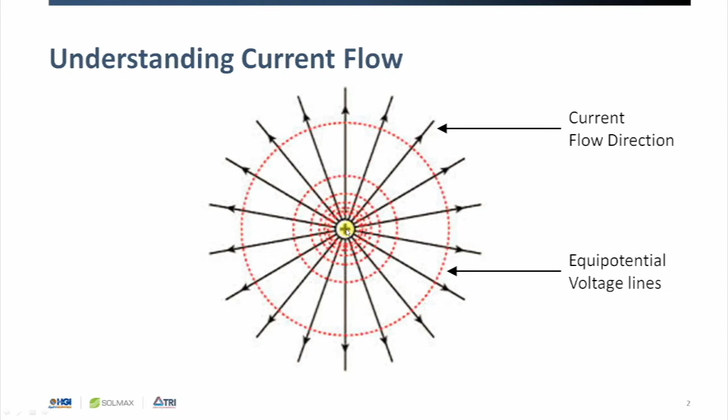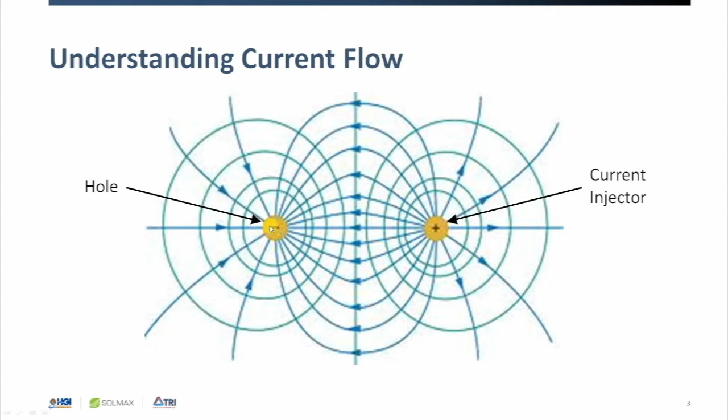It's easiest to visualize the current flow by thinking of it as flowing like water. So when we charge a survey area with voltage, it's like filling a reservoir with water. And then if that reservoir has holes or outlets, it's going to slowly trickle out of those holes and outlets. So the voltage potential lines end up looking like a topographical map that corresponds with the hydraulic surface elevations.

So in this diagram here, we have our positive electrode. This would be a voltage high point, and our voltage low point would be where there's a leak. We have a dipole operator that's reading the voltage potential lines from the surface. So the leak is going to look like a bullseye centered around that leak location.

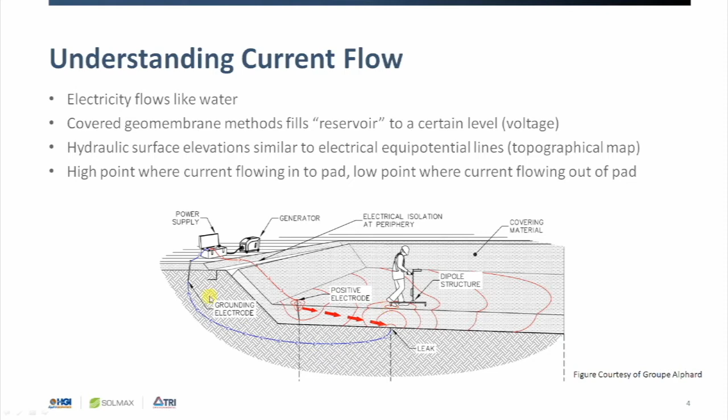There are actually several methods for testing covered geomembranes. There's a monopole method where you have a roving single probe on a long cable with a static reference electrode, and this is going to produce a voltage map that's a lot like a topographic map. Then we have the dipole method, which is the most commonly used. The reason it's the most commonly used is that, frankly, it's the most effective. We'll talk about why in a couple slides.

It's also the only method with an ASTM standard practice associated with it. In fact, there are two of them, and I'm going to be talking about the differences between the two in the next webinar.

There are also some advanced geophysical methods that are proprietary. We have deep soil fills, buried tanks, deeply filled ponds that Sean's going to be talking about in episode 4, and the permanent monitoring systems he described last time. For me, covered geomembrane methods just means the dipole method, because that's the only method that I perform. To Sean, it means the dipole method plus some other proprietary methods that he will be talking about later.

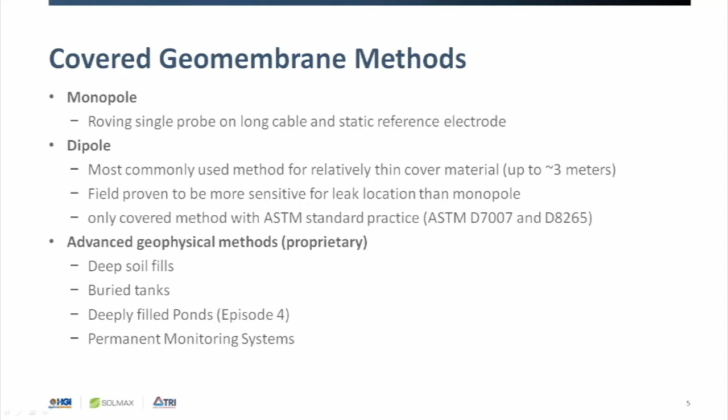You'll notice string lines placed throughout the survey area. You must survey in a grid pattern throughout the survey area. If you don't have a GPS guided system, you'll need these string lines. Even if you do have GPS, you still need the string lines if you don't have a GPS based guidance system.

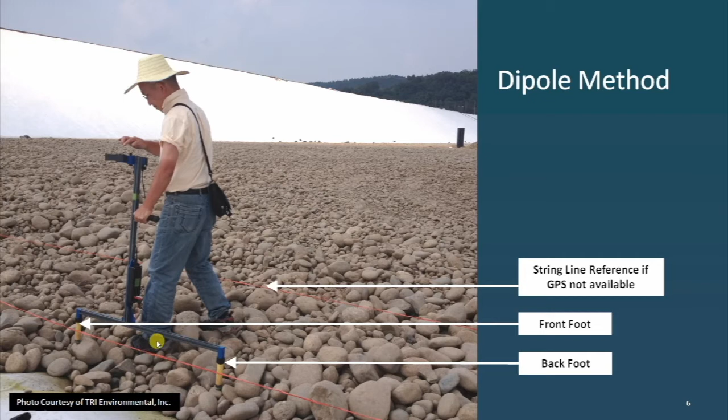So the dipole apparatus is not measuring absolute voltage like the monopole would measure. It actually measures the voltage gradient, which would be like on a topographical map, measuring the slope of the surface of that map. Rather than getting an absolute elevation, you're getting an elevation differential so you can tell whether the ground is sloping downward or upward. So leak locations are like sinkholes - they're low points in the topography.

As the dipole travels across it, you're going to get a downward slope followed by an upward slope as you travel past that leak.

I use an internal convention of measuring from the front foot to the back foot, because otherwise it won't make any sense when I say downward versus upward slope. You have to have a standardized reference. So I'm always going to refer to the dipole measurements as being measured from the front foot to the back foot. To help you understand how to read a map created by the dipole method, it's easiest to show what that same map would look like using a monopole.

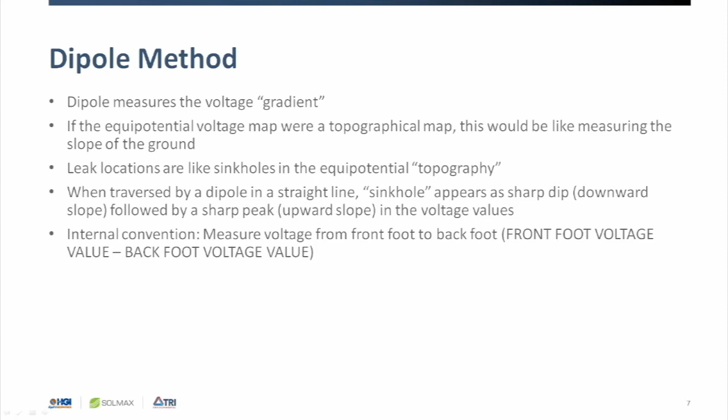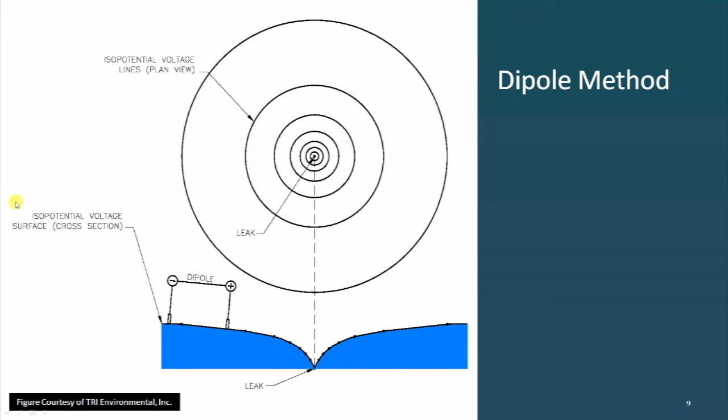This slide shows a plan view of the voltage potential lines and what the dipole actually measures in terms of voltage as it travels across the leak location. This traverse is right across the leak, so one of the feet is going to hit the leak. As it travels across the voltage values, you see the zero right here.

This is a negative voltage range. The magnitude of the negative voltage is going to get very sharp right when the front foot is over the leak, so you're going to have the most negative value when your front foot's on the leak. Then it's going to pass through zero and you'll get the highest positive when your back foot is over the leak, and then that positive value will taper down to background values.

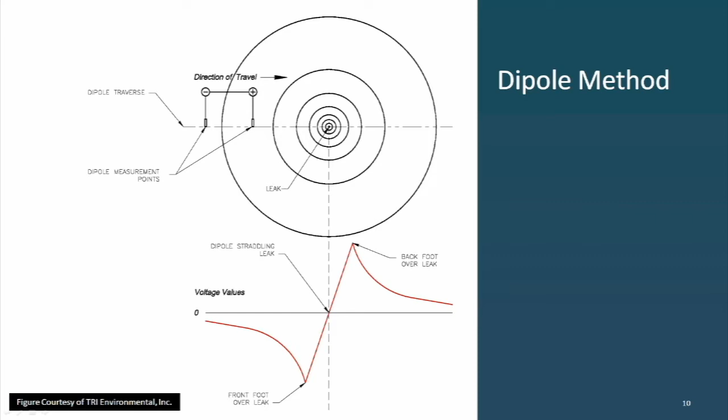This slide shows what the dipole traverse looks like when it's slightly off of the leak. The voltage values, you can see the curve is a lot softer and the magnitude of the signal is not as big as when the dipole is directly over the leak.

What this does is allows us to pinpoint the leak and get right on top of it because we move back and forth until we find the strongest negative and positive sign change in the voltage values.

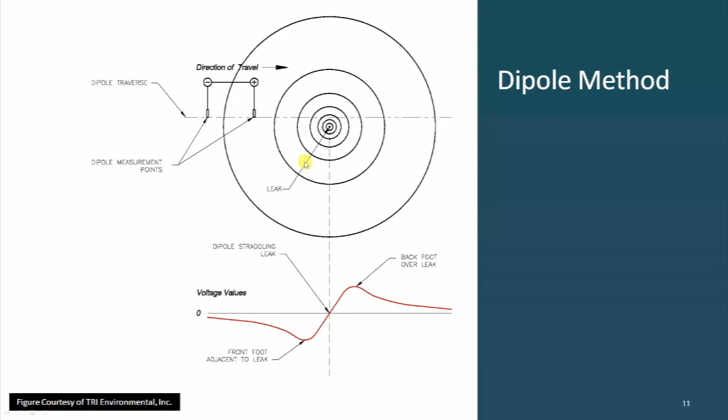So this is a voltage map created by the dipole method. The dipole is traveling from bottom to top of the map. The current injector is located here. What the current injector does is it roughly divides the survey area in half, and it has positive values on the bottom half of the map and negative values on the top. When you're looking for a leak, you're looking for something with the opposite polarity of the current injector.

Current is coming in at the current injector and going out at leaks. So leaks tend to look like a little butterfly on its side, with a little bubble of negative below and a little bubble of positive above, separated by tightly spaced contour lines. So we have a fairly large leak signature right here and a little bit smaller leak signature right there.

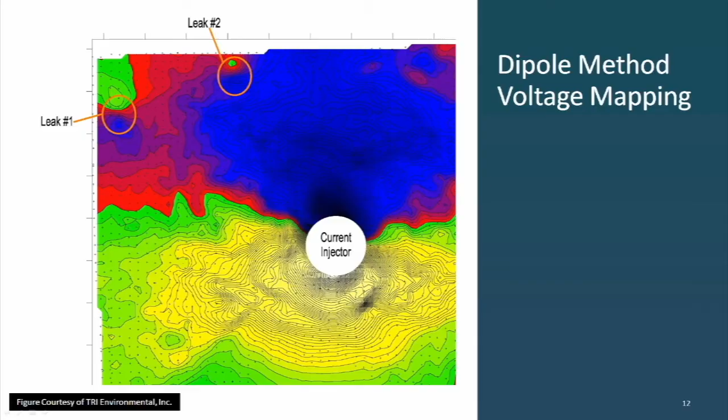This is a double dipole. It actually has a dipole on the left and a dipole on the right. And it has not only GPS-based data acquisition, but it also has a GPS-based guidance system. So you notice there's no string lines in the survey area. This unit creates a local coordinate system and guides the operator virtually, so they're just following along the y-axis of the survey area.

When you have a guidance system like this, it saves time in laying out those string lines. And when you have GPS-based data acquisition, it's much easier to get much better resolution for survey areas that aren't square or rectangular. So if something is shaped like a big amoeba, you can just go off your line and record data points as necessary. If you're stuck surveying along those string lines, you're only going to be collecting data along those string lines.

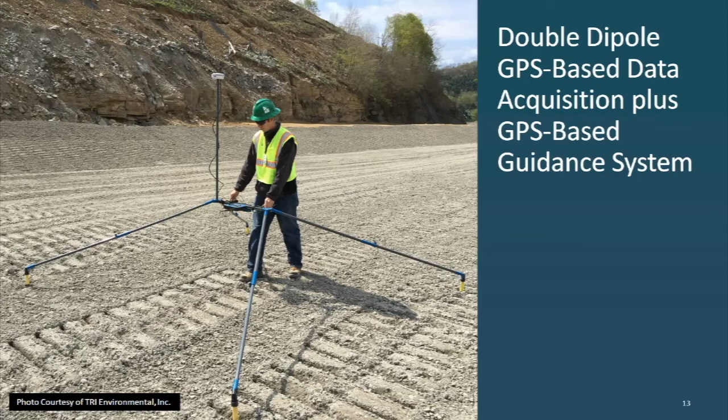Now I'm going to talk about how to prepare a survey area to be electrically tested. Current is always going to travel the path of least resistance, so if there's an access road in place or anything that allows the current to flow outside the survey area, it is going to compromise the leak detection sensitivity.

Anywhere the cover material is providing a current path to the underlying material or to ground is going to behave like an actual leak. So us as electrical testers, we have no idea whether it's a leak or something else that's conducting the current. So as designers, you need to be cognizant of what could possibly cause current leakage from the survey area.

If we can manage to create complete electrical isolation of the cover material, the only path the current can take is through leaks, and that's when you're going to get your maximum sensitivity. So there's two things that we need for applying the method: we need survey area isolation, and we need moisture.

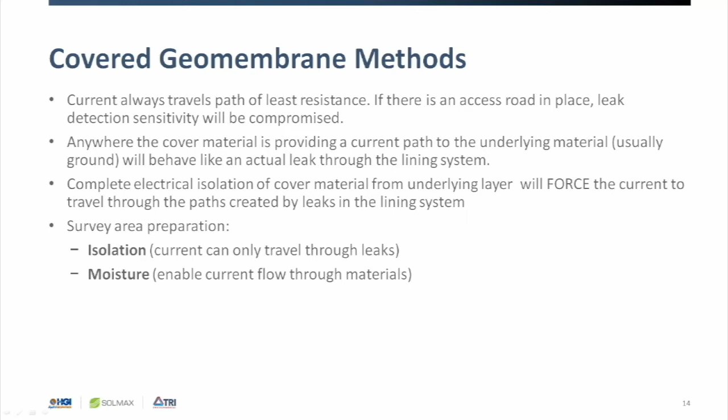First, I'll talk about isolation. Here's a photo of a new landfill cell, and you can see that there's a gap that was created in the cover materials. The geosynthetics are intact in this gap, so there's liner and geocomposite or geotextile. It's fine for those to be intact.

It's just the gravel and soil-based materials that are kept away from that tie-in area. This is what we call an isolation trench. It's critical for method functionality.

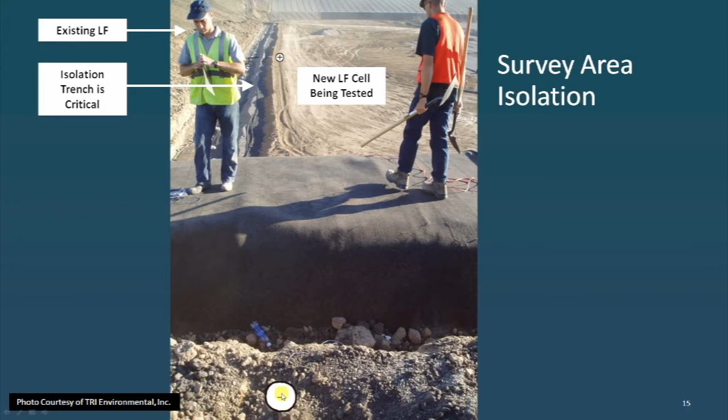Here's an illustration: this is the positive current injector electrode inside the new landfill cell, and we have a ground outside because this happens to be a single-lined landfill. We need isolation along every side of the landfill. Some people don't realize that even the tie-in needs isolation, every single area.

This is an oddly shaped landfill expansion cell, but we need isolation along the entire perimeter, even the access road. Usually the cover material is hauled from a location or locations, so we need this cut, and ideally as dry and clean as possible.

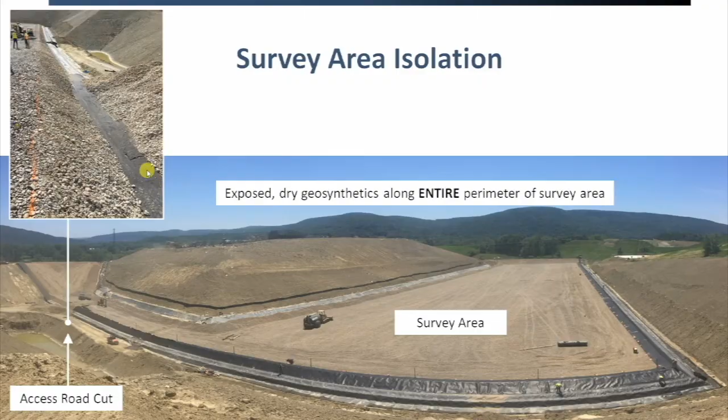This is another isolation trench. We have the survey area on the left and the ground on the right. You'll notice there's a lot of piles of material here. It's very common to leave a windrow right outside this isolation trench because the contractor is going to eventually fill in that trench. Those piles of material are not an issue, especially if you have a larger dipole spacing.

The thickness of the cover material should not exceed the spacing of the dipole. The dipole we use is 3 meters or 10 feet. So we can deal with piles up to 10 or 15 feet thick, and have actually detected leaks under piles that thick. This is an anchor trench.

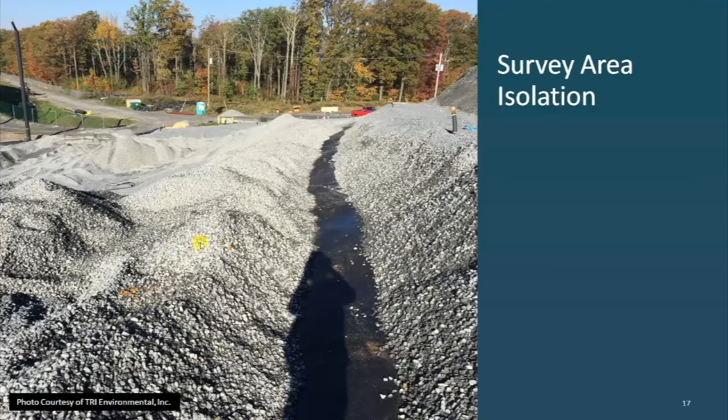You can see the geosynthetics are intact. Something like geocomposite and geotextile, they're not electrically conductive when they're dry. The problem with these is they can actually retain moisture when they get wet. So sometimes when there's a rain event, we might need to wait until these materials dry out.

The other thing about these materials is if they get muddy, they're very hard to clean without cutting them back. We've had some cases where they get so wet and muddy we have to cut them back. We don't want to do that, so it's best to keep them clean and hopefully dry. But if it's just rainwater, that can dry up fairly quickly in the sun.

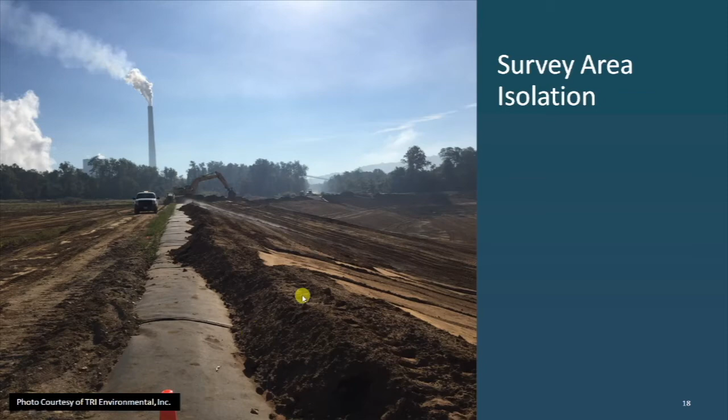This is an LCRS trench. We do not want that rock in place. It's better to just not place that rock. It looks like they placed this and now it's quite dirty, and they pulled it back after we told them we needed isolation. Much better to just not place that material in the first place.

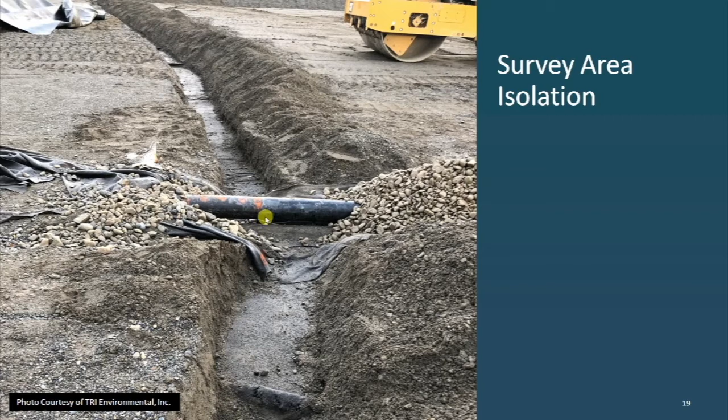This is a tie-in area. See how much moisture is here? This is a very common sight. A lot of the sites we perform this method on get rainfall every 3 or 4 days, so it's virtually impossible to keep this particular tie-in area perfectly dry.

The thing is rainwater is not conductive. When rainwater hits some mineralogy, it can pull off some ions and become conductive, but it's not super conductive. So this kind of isolation issue is not a deal breaker, we can usually manage something like this. The thing that's not good is when this is muddy. Rainwater okay, mud not so much.

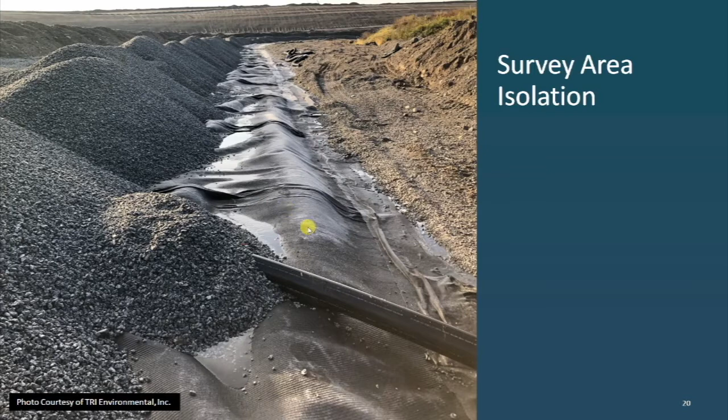We strongly advise the contractor to place a rub sheet under the access road so that when they remove it for our survey, it's not that dirty. They put this rub sheet down on top of the geocomposite so when they place the material, it doesn't fill the geocomposite with fines. So under this flap right here, the geocomposite is actually very dry, which provides much better isolation for us.

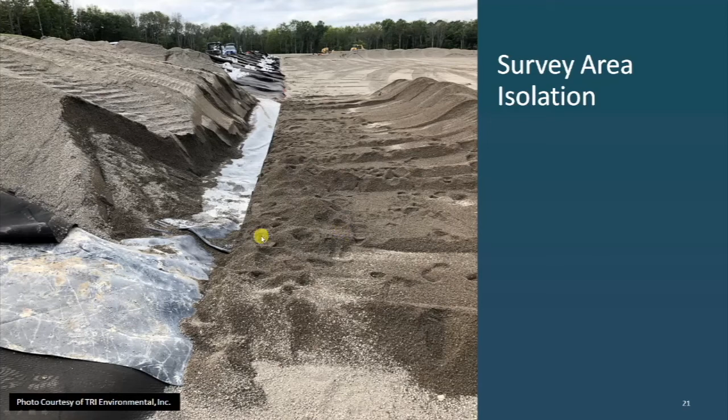If we need to water during the survey, so we need an access road in place, you can always weld a little geomembrane flap along the access road location and then push the material up. This geomembrane flap actually bisects the access road so that the road can be in place for the trucks, but it's actually electrically isolated.

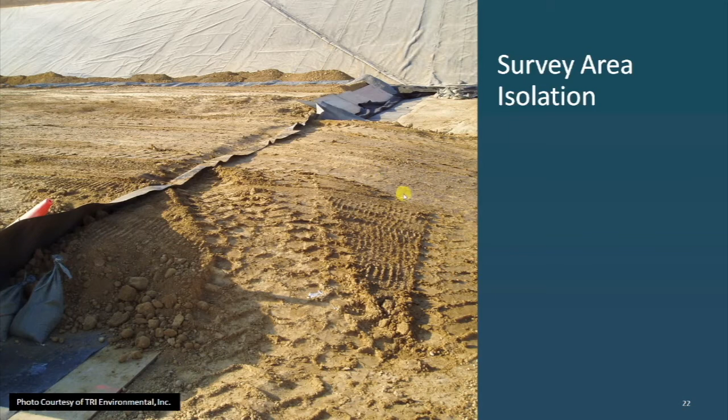So as I was surveying, I started picking up a leak signal and it led me right to this pipe. I thought, what's that made of? Turns out it was ductile iron. So I stopped what I was doing and had them excavate the iron pipe.

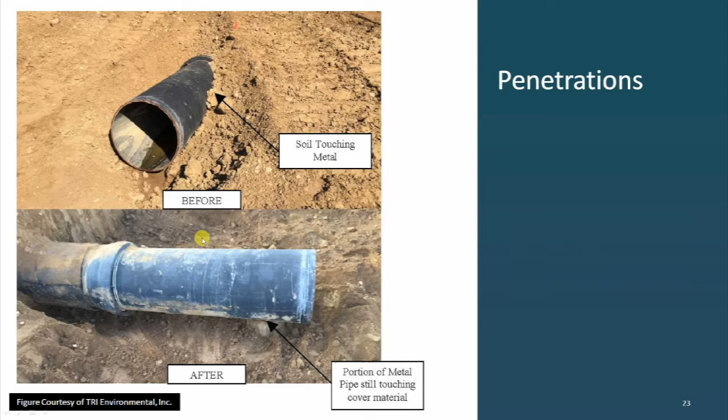But fortunately, I was able to still pick up a little knife slice in this project. So at this particular project, yes, it disrupted the survey, but it really only compromised sensitivity locally to the penetration. For this project, every project's different. Sometimes something that large can mask leaks anywhere in the survey area.

In fact, before we excavated that ductile iron pipe out and left that little wet wood in place, that ductile iron pipe was affecting the sensitivity of the entire survey area, because my artificial leak was set up on the far distant half of the pipe, and the sensitivity was poor to begin with. Then I checked it again after we excavated the pipe and it was very good. So this is why we try to minimize the isolation issues.

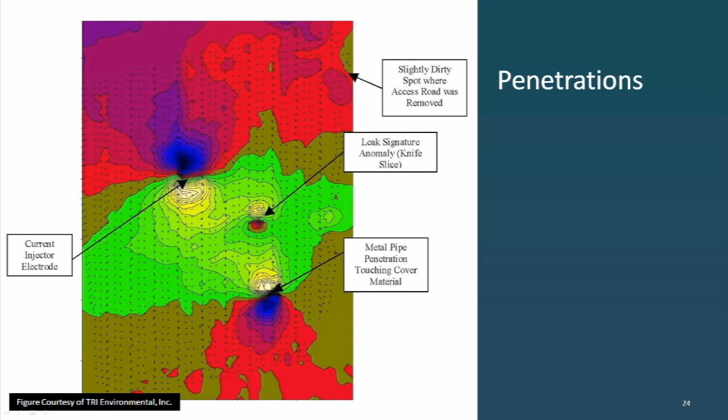So we talked about isolation. The next most important thing in survey area preparation is moisture. This is the most common question I get: how much water do I add? How much moisture? What's the moisture content? How wet is wet enough? Unfortunately, it's not a simple answer. The answer is there's actually 3 different reasons why we need moisture in the cover material.

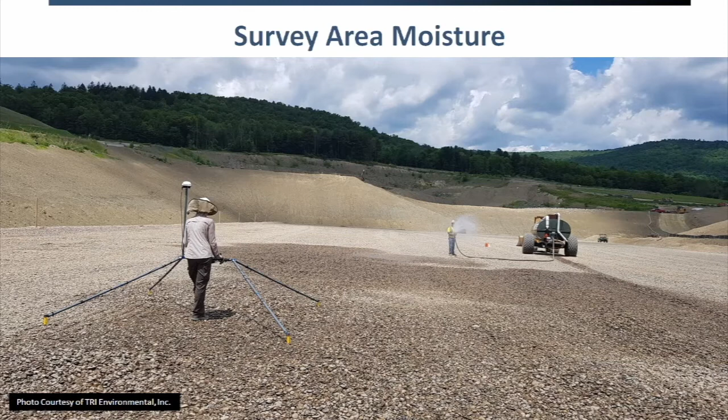The first reason is that the cover material itself needs to be electrically conductive. We don't usually need to add moisture to make this material conductive. Usually it's conductive enough at a natural moisture content. The highest moisture content we could possibly need is for something like sand, and it needs about 6%, but usually it's only about 1%. Very, very easy to attain.

The other reason we need moisture is that if you have a very small hole, and especially if you have overlying geotextile or geocomposite, that hole is not going to be electrically connected to the cover material unless it's wet. So ideally, we want the survey area to have experienced rain recently, but if it hasn't, and all of those geosynthetics are dry above the hole, it really needs to be watered enough to actually cause the geomembrane to leak if you want to find those really small holes.

The third reason we need moisture is that the surface will sometimes desiccate, depending on the material. Something like a clay or a gravel, they tend to desiccate in the sun. So it's weather dependent, it's climate dependent, but we need our probes to have good contact with the cover material.

So when we come to site to test, the only reason we're going to ask you to water is if we can't get good readings through the surface. We will document the condition of the liner. We're going to dig a test pit down to the top of the geomembrane to place an artificial leak, which I'll be talking about next episode. And we're going to make observations on whether the geosynthetics are dry or not. But ultimately, we're not going to direct the moisture unless we can't read through that surface.

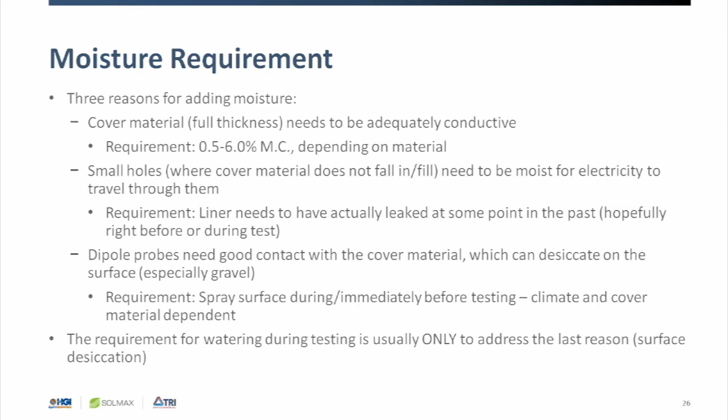If you can't drive on the cover material to water with a water truck, which is the easiest and most effective thing to do, you can also park the truck to the side of the survey area and extend hoses and water it that way. So that's what this photo is. You can see a dipole there and people moving those hoses around to water. If you can't access it via hoses, you can always just use these little water backpack sprayers. This is perfectly sufficient because we just need the surface wet where we're taking the data acquisition point.

So keep that in mind, that we're not going to direct you to water any more than we need to read through the surface. But the truth is, if that geomembrane has not leaked in the past, then we might miss those little small leaks. So it's really easy to water the cover material before or during the testing, but the underlying layer, if it gets installed dry, there's no way to irrigate that after the fact. So it's really important to get that right.

Typical subgrade is virtually never problematic. Again, it doesn't require a lot of moisture for a natural soil layer to be electrically conductive. It's only about 0.5%. And also, when that layer gets covered by a geomembrane, then the moisture tends to wick to the surface.

The one scenario that is really problematic is when we have what I like to call an encapsulated geosynthetic clay liner, or GCL. What I mean by that is a liner cross-section of, from bottom to top: secondary geomembrane, GCL, primary geomembrane. It doesn't matter whether or not there's geocomposite in those layers. What happens is that the GCL moisture content is always conductive when it comes out of the factory because there is some moisture in there.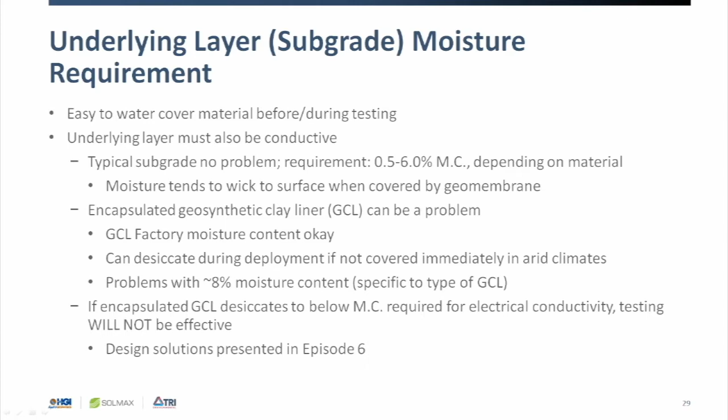So let's talk about testing the primary geomembrane of a double line facility. This is one example of a cross-section that we might test. We have cover material, primary geomembrane. This particular cross-section has an encapsulated GCL, and then we have a secondary geomembrane.

The problem with this cross-section for testing is that we need electrical access to the GCL layer because we need to connect our return electrode to this layer. So if it's desiccated, the current's not going to be able to make that loop. So what we're going to do is instruct you to insert electrodes into that layer.

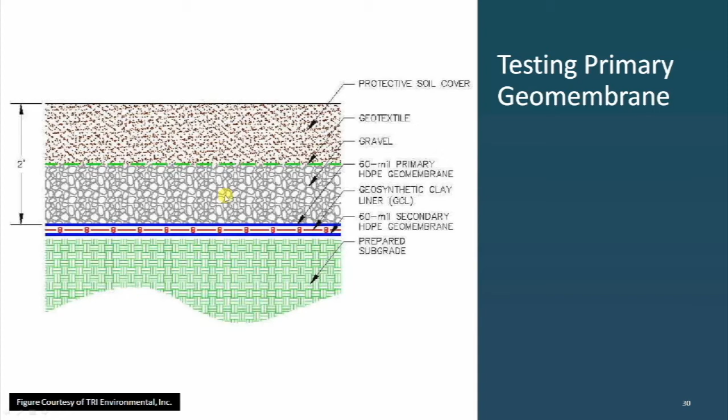I like for them to be placed below the GCL to add extra weight to it. And we want at least 2 separate wires: one main wire for testing, and a separate satellite wire completely disconnected from the first. Why do we need 2 wires? So that we can do a check to make sure that the subgrade is sufficiently electrically conductive. If you have a leak location contractor who only asks for 1 wire to test this kind of system, that should be a red flag, because there's no way to test for sufficient conductivity in that layer. They'll perform the test and hopefully it's conductive enough and it works, but if it's not, nobody will ever know.

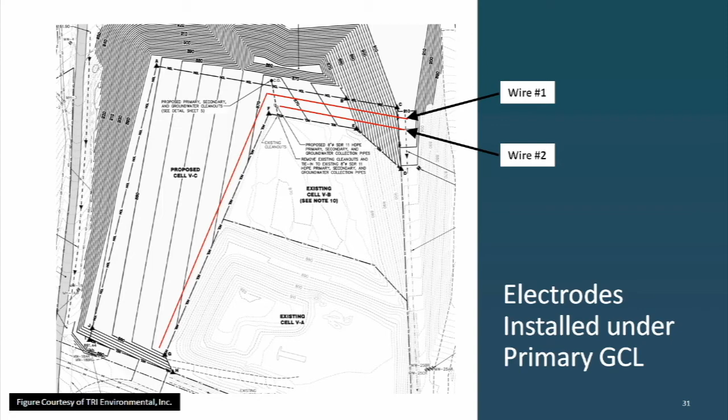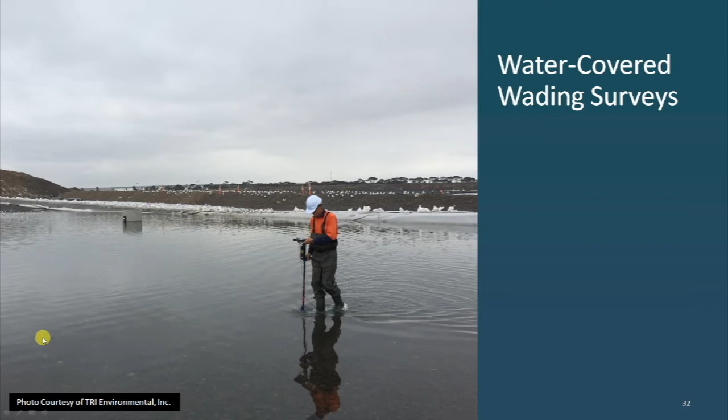So let's talk about water-covered wading surveys. They're extremely sensitive because even the smallest of leaks are actively leaking during the survey. You can pinpoint it exactly by moving that dipole back and forth and drop a weight exactly where it is. The downside of this is there's no ability to isolate the leaks during the testing.

For soil covered, we can locate a leak, excavate it, separate it from the cover material, and test around it because, as you know by now, large leaks can mask other nearby leaks. So you might have to retest this if you find extensive damage, especially if you find a location of large damage. So there are two ways to perform this testing using the dipole method.

You can do real-time leak detection, where the analog voltage measurements are converted to an audible signal. You can also do data acquisition or mapping. The data acquisition or mapping approach is the same as the D8265 soil covered voltage mapping that we're going to talk about in the next episode.

The real-time leak detection per D7007 is very similar to the bare geomembrane methods, where the instrument basically beeps when there's a hole. It's very operator dependent, and as I said, it requires more dynamic instrument adjustments, so it really requires a lot of expertise. There's no document produced that allows the results to be reviewable. You're just trusting that the operator knew what they were doing, surveyed the complete area, and had the capability to find all the leaks.

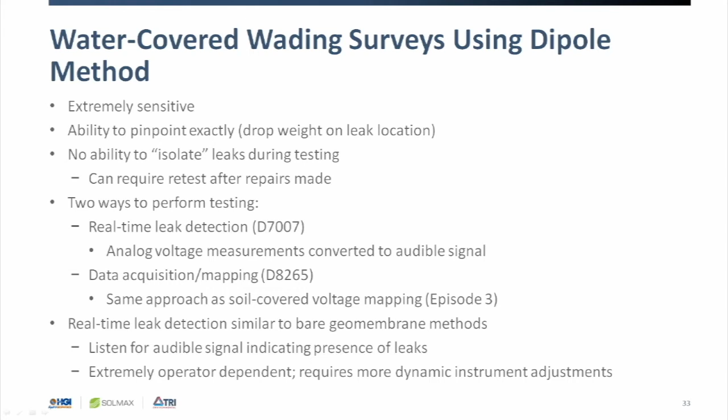If you can add GPS to the water dipole, you have the best of all worlds because you can press the button as often as you want. The one positive of the analog voltage measurements, where you're looking for the tone, is that you can obtain as many measurements as you want. The same is true when you have a GPS attached to the instrument. You can constantly press the button. In fact, we set our y-axis and then we just press the button all the time as we walk along those lines, so you can get really good resolution, plus you get a map at the end of the survey results.

Now Sean is going to talk about factors in leak detection sensitivity. He and I were working on putting this list together, and the more we talk, the more things we could think of. There are just so many factors in leak detection sensitivity for these methods, and I'm sure there are a lot more that we don't even know about yet. So with that, here's Sean.

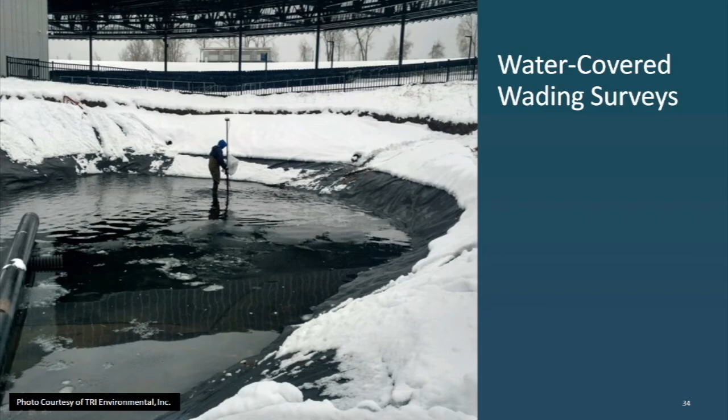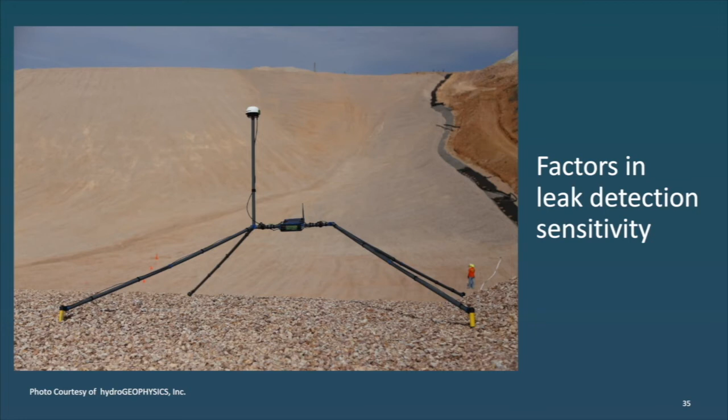Thank you, Abigail. Again, my name is Sean Kellendine, and I'm with Hydrogeophysics. Now we're going to take a moment to discuss factors in leak detection sensitivity for electric leak location surveys. This includes perimeter isolation, size and number of leaks, measurement density, material conditions in the survey area, and dipole spacing.

The number one factor in maintaining good survey sensitivity for a successful ELL survey is understanding the survey area's electrical isolation needs. Electric leak location is governed by a tenuous influence between the fill material's electrical properties, the resistive nature of geosynthetic liners, and the degree of electrical isolation obtained in the area to be surveyed.

We know electricity follows a path of least resistance, much like water flows through a pipe or a river. This is the classic analogy useful for explaining Ohm's law and how these three variables interrelate. In a geosynthetic containment system, the material filling the reservoir is used to carry current throughout the survey area. A high level of electrical isolation will ensure that the current is available for the leak location process.

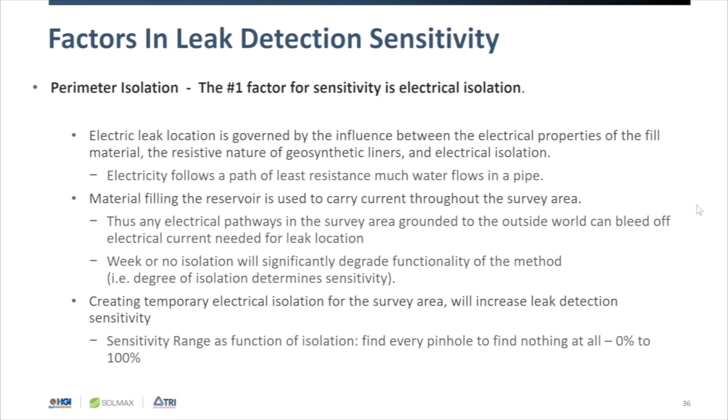However, we must consider that any electrical pathways in the survey area that are grounded to the outside world can bleed off electrical current needed for leak location. So it is critical to create a temporary electrical isolation state for the survey area to increase and maintain leak detection sensitivity. The level of electrical isolation will determine the difference between finding every hole or no holes at all.

Again, with covered geomembranes, the material filling the system is what is used to carry current throughout the survey area. For a leak to be detectable, current needs to travel through the leak with an intensity that is significant and measurable when compared to all other current pathways available.

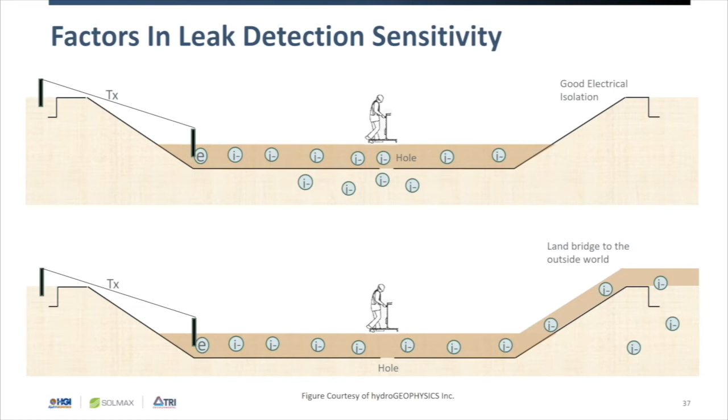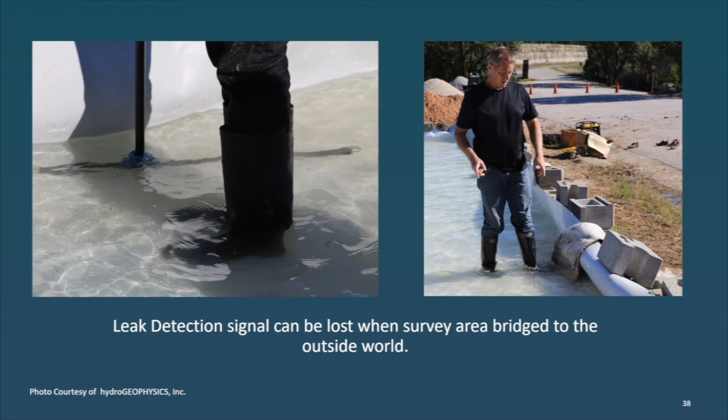The strong current path to the leak has been replaced by a strong current path to the GCL bridge. Now, once the GCL was removed, the strong current path returned to the leak in the liner, and we could now see the leak response again.

Now, there are many other factors that are also significant for leak detection sensitivity. Conditions local to a hole, a leak, for example, must maintain good contact between the cover material and the subgrade. If the material, the liner, and the subgrade is dry, and there is no electrical pathway between the material, the hole, and the subgrade, then there will not be a detectable electrical leak response. In order to locate leaks, a quality electrical pathway must exist between the cover material and the subgrade.

Now, this is predominantly a challenge for soil cover systems and obviously not so much for water covered systems. Stainless steel and porous pots are also important. Equipment design matters. Stainless steel electrodes, for example, will polarize, creating an electrical barrier potential that will increase noise and reduce signal if there's not enough available current to overcome the electrode's barrier potential and surface contact.

Now, this does not mean that stainless steel electrodes can't be used. If the fill material is significantly conductive and there is enough available current to overcome the electrode's barrier potential, then they will work. However, porous pots are a much better bet as they reduce noise through the direct transfer of ions from the material surface through a copper sulfate solution, making readings much more sensitive and accurate.

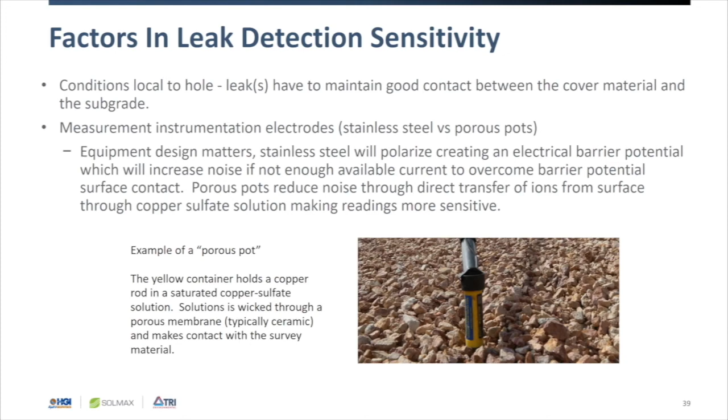Now let's look at how current moves through the material and why this impacts sensitivity and our ability to find leaks in liners. We are going to look at electrolytic conduction. Most earth materials can transmit electrical current. Now the rate of current flow is related to the material properties, i.e. is it resistive or conductive? Now electrical conduction is a function of the following: moisture, ionic strength, porosity, ionic mobility, mineralogy, and tortuosity.

So where is electrical current flowing? Well, electrolytic conduction relies on fluid-filled pore spaces and available ions. That is the fraction of water filling the pore space, the fraction of ions available for current flow, and the fraction of pore space relative to solid grains.

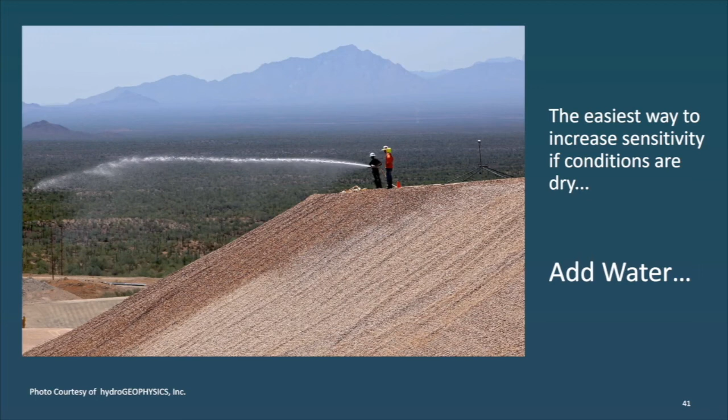One of the most important factors for electrolytic conduction is moisture. If you're in a situation where your material is really resistive and dry, simply add water. It will increase your leak detection sensitivity.

A larger dipole spacing also enhances the leak signal and increases the leak detection distance, even when applying the maximum measurement density prescribed by ASTM D7007. A 1 meter dipole cannot achieve the level of sensitivity of a 3 meter dipole at a 3 meter by 3 meter density. This does not mean that a 1 meter dipole configuration is not a valuable option. On the contrary, if space is limited due to site size, obstructions, or other space limiting factors, the 1 meter dipole system can be an important asset.

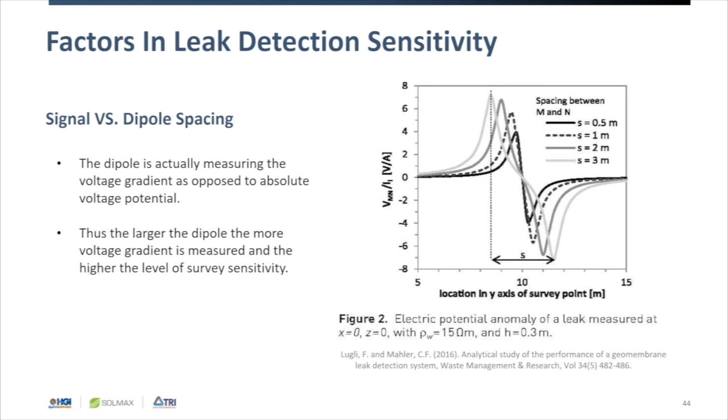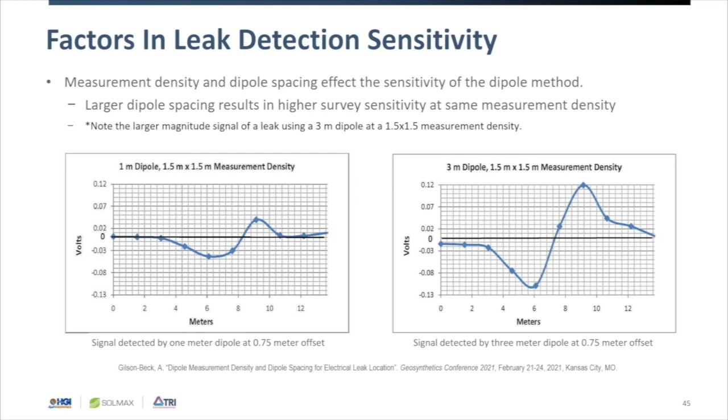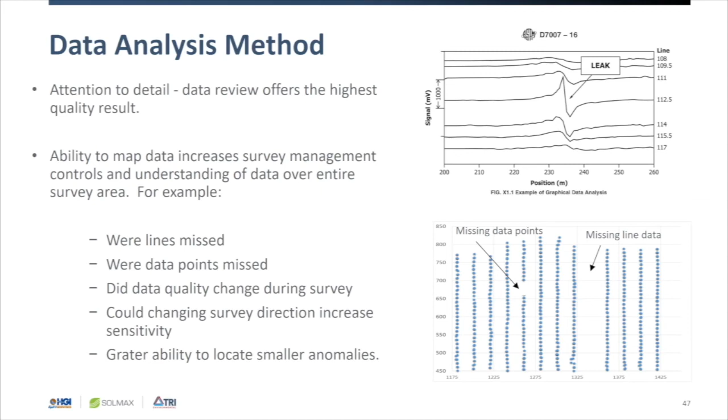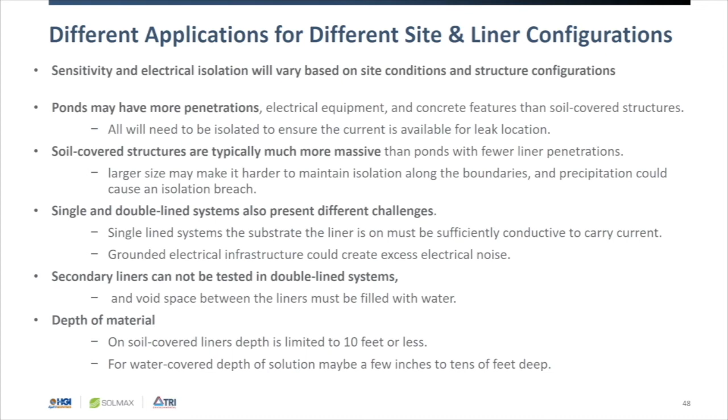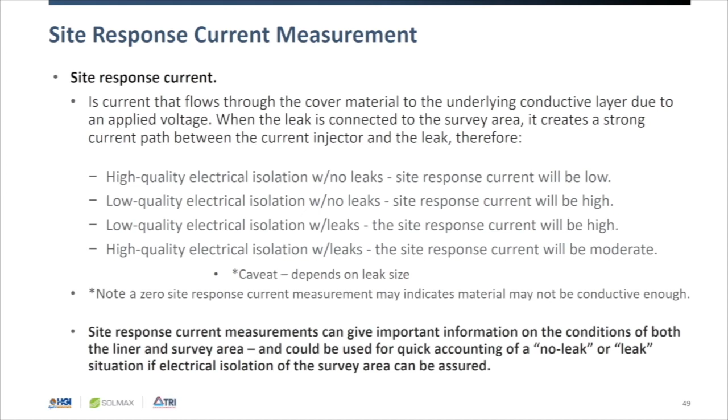Not necessarily water path, but electrically conductive path, right, which usually means some amount of moisture.

We did talk about this in that one particular slide, this idea of tortuosity, right? What is the actual pathway current is following. So if, for example, your current is moving through the material that has really low moisture, but there's still ion flow and it connects through a hole, you're going to have a pathway. Now, if you add water to it, then that's just going to increase your sensitivity and give a better pathway through the hole to the subgrade.

In a double liner system where the underlying conductive layer for your primary is a GCL, I like to install the copper wire just before the GCL goes down. If you do it after the GCL goes down, it's okay, I just like the extra weight of the GCL to be there because you want good contact between the copper wire and the GCL. But in any case, before the primary geomembrane goes down, you want that electrode installed.

I imagine this is something that you run into a lot, Abigail, as far as the timing and making sure the engineer knows when to do this. Yeah, and just so you know, it doesn't make it impossible for us to do leak location if that electrode's not installed. What it does mean is we need to figure out how to gain access to that layer.

So I test a lot of sites that don't plan for leak location. They know they're leaking because they're double lined. I come out and I just figure out where I can put my return. So I like to try to put my return as close as possible to where that liquid's coming out. So if they have a witness zone, a leak detection sump, I want to put it right in there and touch the liquid with it. And basically, if that hole is connected to the wet path, which it will be, that's where I want my electrode.

Here's the thing with measurement density: it's meaningless to talk about measurement density if you're not referring to the size of the dipole. The more important of the two is dipole spacing, and it's totally appropriate to do a grid spacing that's equal to your dipole spacing. So I agree, I would never perform a 3 meter by 3 meter test with a 1 meter dipole. That's crazy. But if I have a 3 meter dipole, it's totally appropriate to do a 3 meter by 3 meter spacing.

Normally surveys are done in one direction, and the direction is pretty much arbitrary, it's whatever's easiest to do. It's usually, I like the long axis. So you only have to run the survey in one direction according to both ASTM standards.

We were just mentioning that as one of the factors in sensitivity, direction actually matters. It's not required anywhere by any standard. It's one of those things, you may or may not miss a leak because of the direction you choose, and there's really no way to know unless you survey both directions.

It's practically never done to survey both directions unless you have the double dipole equipment that does both at once. That way you don't spend any extra time doing it. It's like an extra measure that you get for no additional cost.

The other thing too is that when you're in the middle of a survey, if you notice strange anomalies or strange readings, you can survey different directions in that particular area to increase your resolution and narrow down and maybe tease out a leak or no-leak situation. Because you may actually see something and you're not sure what you're seeing, so if you change directions, it might become more clear.

That's absolutely right. When we go back and look at the map and see a little weird anomaly, we're not sure what it is, we go back and always change direction. Like, okay, you don't see it here, but do you see it here? That's actually another way to weed out signals.

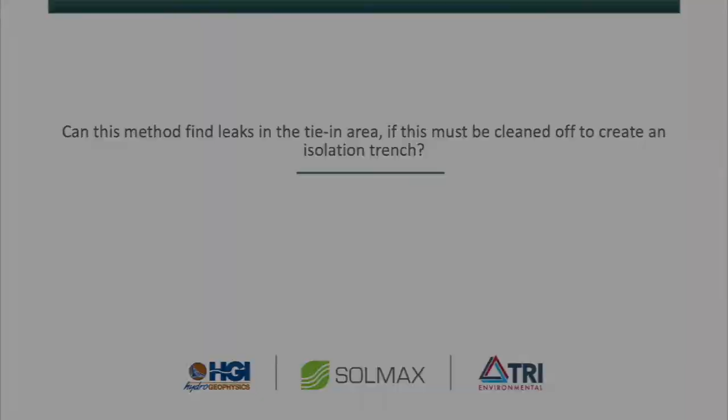That is a really excellent question. Yeah, that is. Abigail, you want to take that?

It absolutely can be a problem with an injector in return. I've noticed this at some sites, especially where leachate gets in my circuit or I have weird mineralogy. My current injector is constantly reacting with my cover material, and so I'm observing the current all day, and it's driving me crazy because I want everything to be super precise, and I can't if the current's jumping all over the place.

The thing you can do is cushion the injector from the cover material by encasing it with something that's less reactive. You can also specify constant current so that your power output will oscillate the voltage while keeping the current the same. Still, you might hit a maximum or a minimum, but absolutely it's an issue.

It's definitely a quality control issue, and I bet it's really an issue for a brine pond type solution, which Sean does a lot more of than I do. Yeah, basically you said it all right there, Abigail, so I don't need to add to that.

It can, yeah. I mean, it's all relative, right? How dry are we talking? If it's a completely desiccated system where you have little to no moisture, then yes, that could create an environment that is highly resistive, and you wouldn't get a connection between your overburden through a hole to your subgrade. However, if there's even a tiny bit of moisture and you have ionic flow, then you should be able to see a leak.